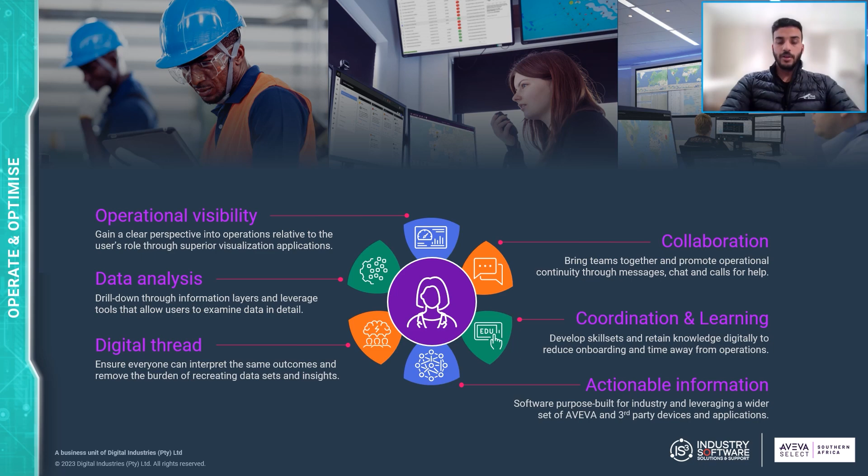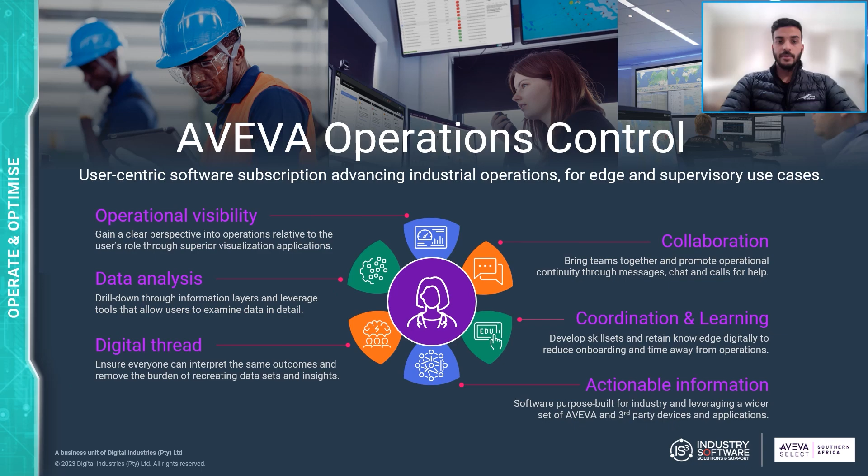It's clear that we no longer need a single product. We need a complete solution. And that solution is called AVEVA Operations Control. It's a user-centric software subscription which advances industrial operations and can be used across all operational environments. AVEVA Operations Control is an industrial software subscription that delivers visualization and control to run your operations.

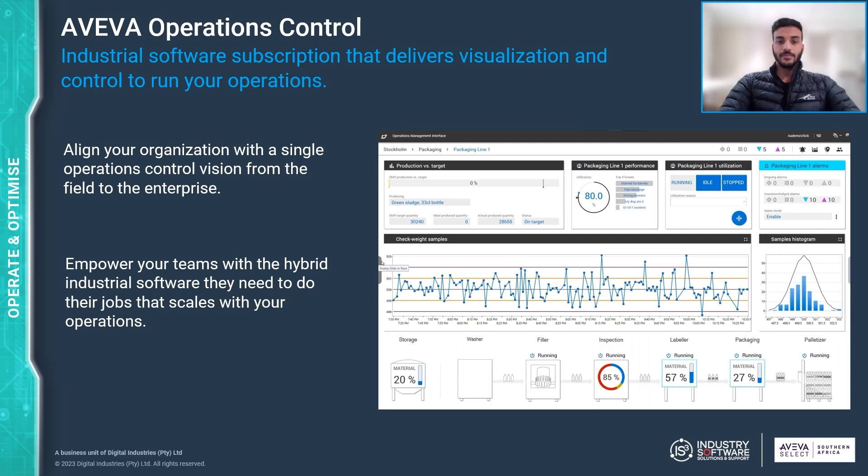AVEVA Operations Control aims to align your organization with a single operations control vision from the field level to the enterprise level. It empowers your team with the hybrid industrial software they need to do their jobs that scales with your operations. AVEVA Operations Control offers a simplified and predictable way of procuring and deploying complete world-class software solutions. These are necessary for modern operations environments, and there are several benefits to the AVEVA Operations Control offering.

Firstly, simplicity. One easy to choose package that reduces purchase and adoption complexity. Secondly, it's unlimited. There's no limitations on I/O, tags, or devices. You can expand information access to more users across your organization. Thirdly, it's comprehensive. Capability that goes beyond HMI and SCADA to drive operations excellence. And lastly, it's outcome focused. You can transform with unparalleled insights and digitize work processes and knowledge.

So we know it's a subscription model, but what forms part of the subscription? What exactly are we subscribing to? With AVEVA Operations Control, we utilize both on-premise software and software as a service. We bring this together as a hybrid SaaS software strategy. As you can see, within the SaaS set, we have software which provides collaboration, analysis, empowerment, and management functionality. These are known as your support systems, and this SaaS model provides the flexibility that we require.

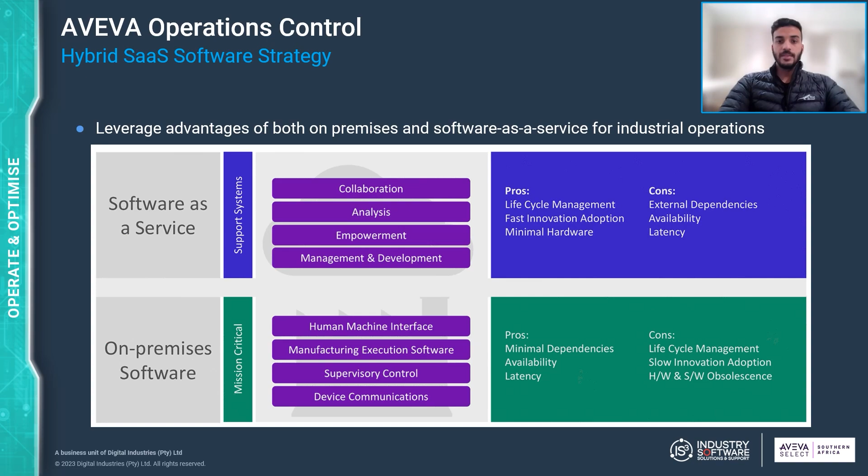So, AVEVA Operations Control, we know it's this hybrid SaaS operations software solution, and it comes in a couple of editions, each with their own unique use case. Firstly, we have the Edge Edition, which works on the control network level. This is looking at your PLCs, IoT devices, and other devices that are found on the production lines and production areas. Next up, we have the Supervisory Edition, which works on the process network level. This is your plant-wide view of your process.

And then finally, we have UOC. This does not form part of AVEVA Operations Control, but it was important to show you the distinction between the three that are available to you. UOC, or Unified Operations Center, is found on the business network, and it typically gives you that enterprise-wide view, and it consists of IT applications integrating with data management platforms.

So let's have a deeper look at the two flavors of AVEVA Operations Control and see what exactly are we getting when we subscribe to this solution with AVEVA Flex. With the Edge Edition, you get a perfect solution for frontline teams that require local process monitoring and control at the asset level or at the equipment or line level with IIoT and embedded HMI capabilities. With the Supervisory Edition, this is ideal for centralized management of distributed operations or production lines into a single unified data model aimed at driving standardization across departments.

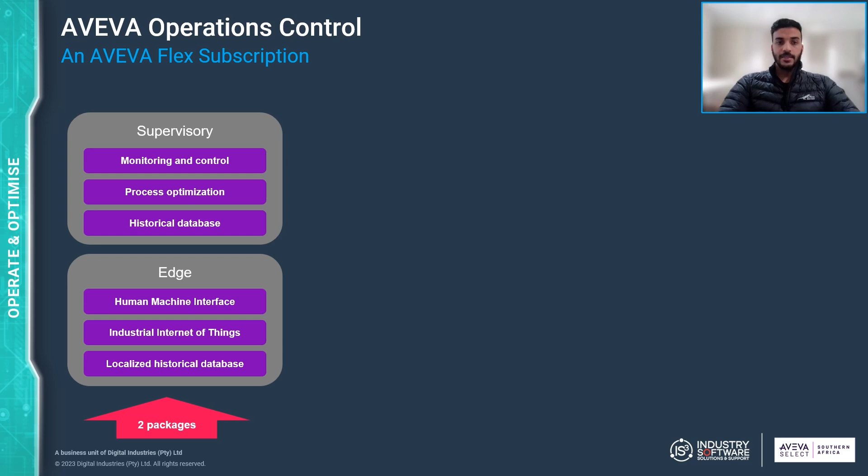So there's two packages that we mentioned. The first being your Edge, which comes with a localized historian, HMI functionality, and IIoT integration. Supervisory comes with your bigger monitoring control software, greater process optimization, and historical functionality. Included in both these packages are common components. These common components are your data communications, workforce collaboration, reporting and data analysis tools, and a few other tools that make it easy for your teams to operate. Additionally, we can add on MES and guided analytics if required.

Typically, in your process plant, you have some recipe management that is required and some production management. So we've made it easy to bolt on these products. You also have your guided analytics. We need this to gain valuable insights into our data and increase the value obtained from your operational data.

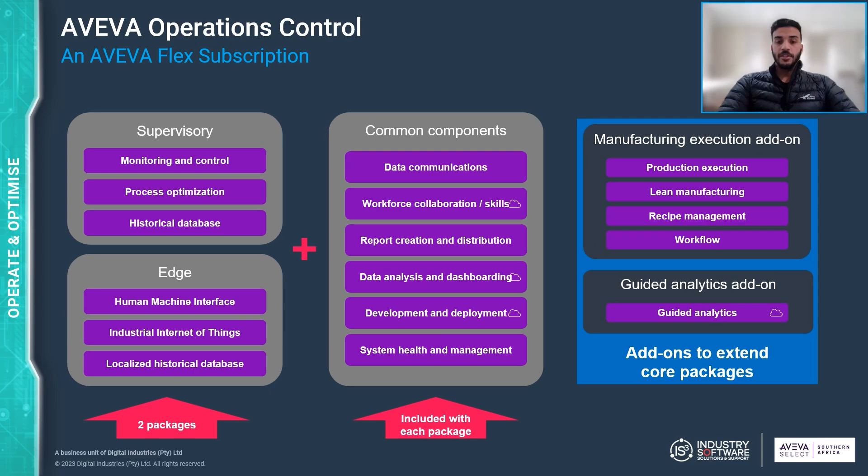So there's many products bundled together in this offering, and let's have a bit of a deeper look at what these individual products are. From the common components, first up, we have your operational visibility. And to achieve our operational visibility requirements, we utilize AVEVA Edge or AVEVA InTouch, or perhaps System Platform or AVEVA Plant SCADA, dependent on the package we choose based on the organization's unique needs.

With these products, we can achieve unlimited architectural flexibility. We can utilize responsive web clients. We can utilize templatization, styling, and standardization options. They are portable graphics with a built-in editor, extensible functionality with apps and widgets, alarm management, and we encourage collaboration with on-premise and cloud development. There's also built-in security and authentication management.

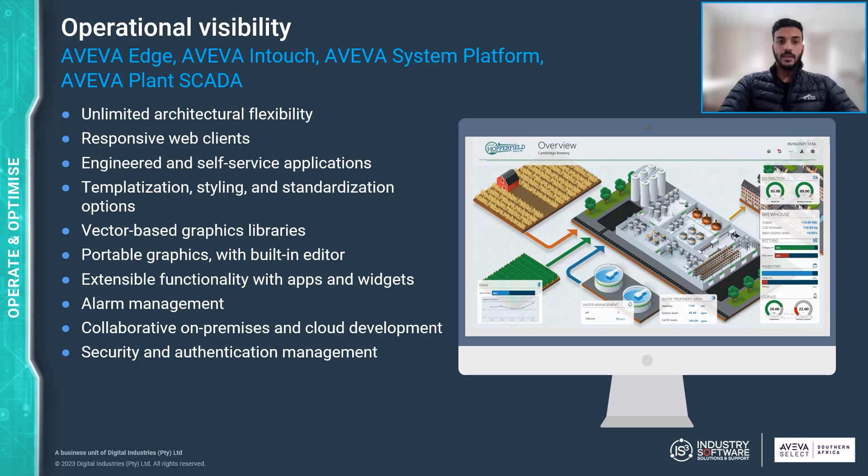To achieve actionable information, we enable access to our data through our extensive communication drivers. These AVEVA communication drivers provide vendor-agnostic connectivity and data exchange. We can utilize drivers for telemetry, industrial standards such as Modbus, and proprietary protocols such as Rockwell, Siemens. We can take advantage of REST and other API types. We can export data in common formats such as Excel. We can deploy software across various OSs, cloud infrastructure, and architectural requirements. We can also leverage AVEVA's product partner network for joint hardware and software solutions.

We also include data analysis tools in way of AVEVA Reports for Operations. And with AVEVA Reports for Operations, you can examine and replay data trends, view trends and historical data within visualization. You can utilize self-service dashboards available on-premise and in the cloud. There's AI support for predictive insights and visual anomaly detection. You can easily assemble dynamic and custom reports for digital distribution, query and export data for further use in other applications like Microsoft Excel. And then finally, you can replicate this data into AVEVA PI or AVEVA Data Hub.

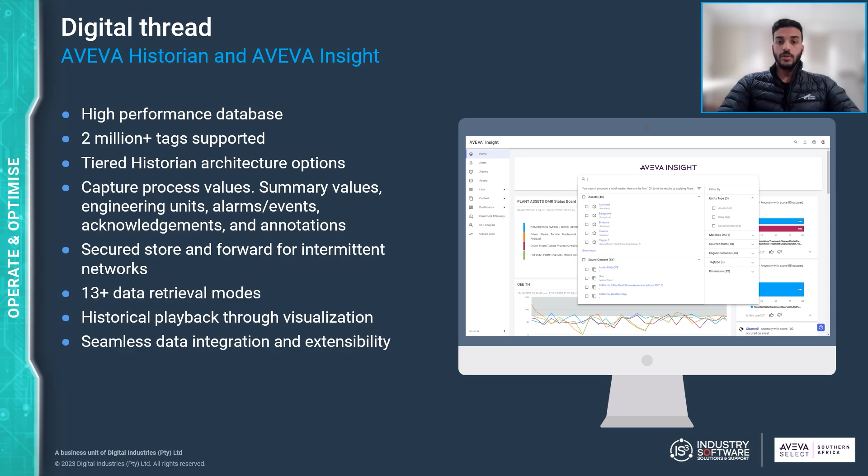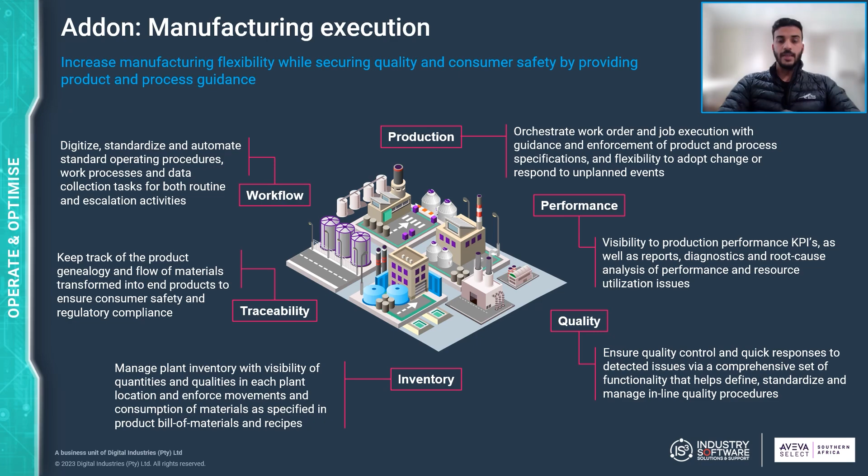With the manufacturing execution add-on, we can increase manufacturing flexibility while securing quality and consumer safety by providing product and process guidance. We can handle key aspects in our operations, such as traceability, performance, and quality with the MES add-on. And with the guided analytics add-on, we can create anomaly alerts to identify tags for monitoring. We can visualize this in AVEVA Insight and build out dashboards to give us indications into the behavior of our assets.

So that's a complete overview of the products found in the two core packages. Let's have a detailed look at what products are found within these two packages. The Edge Edition contains InTouch, AVEVA InTouch or Edge HMI. We have Communication Drivers Professional, allowing you multiple instances of drivers, a full system monitor to monitor nodes across your site, a localized historian, and a suite of other products such as Reports for Operations, AVEVA Teamwork, AVEVA Insight, and more.

The Supervisory Edition is similar, but we're aiming for a broader view of operations. So it contains System Platform or AVEVA Plant SCADA. This allows you to easily build operational visibility of your entire process. With this comes Communication Drivers, the premium version, a Tier 1 historian, and then your common products such as Development Studio, Integration Studio, Reports for Operation, AVEVA Teamwork, AVEVA Insight, as well as optionally AVEVA MES and AVEVA Guided Analytics. It's a complete buffet to a suite of world-class operational software.

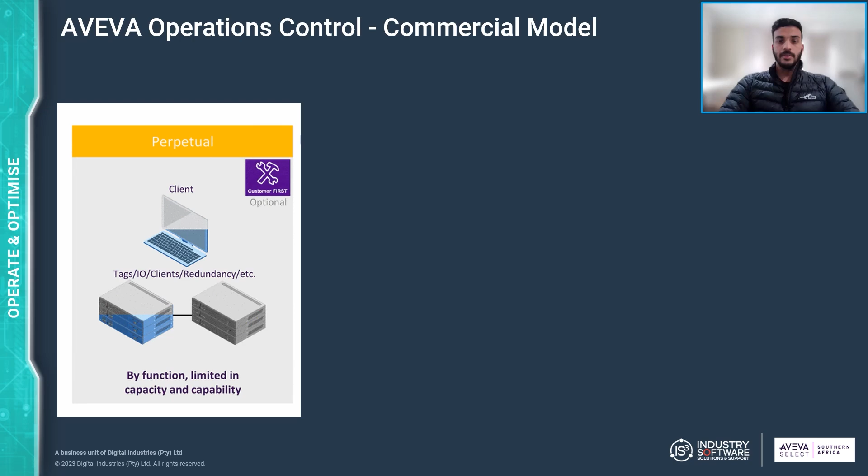So there's different commercial models. Where does AVEVA Operations Control fit in? Traditionally, we have the perpetual model. It's unfortunately limited in capacity and limited in capability. We've now moved on to AVEVA Flex, where you can subscribe to individual products. It's more agile and allows for flexibility. You are now unlimited by capacity. You can add on more, but you are still limited by capability.

The new way, AVEVA Operations Control. It's a hybrid SaaS software solution, and we are removing limitations. We are improving our operational capabilities. We are aiming for operational excellence. We want to provide our teams with the tools they require.

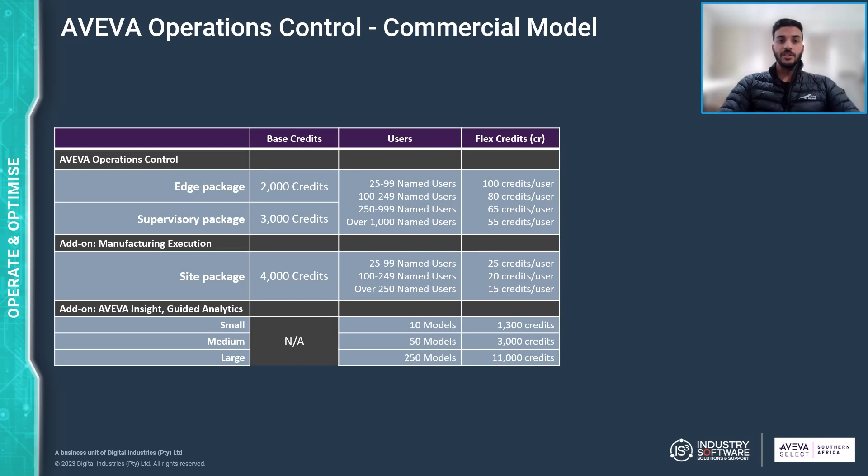So we've got a simple model with AVEVA Flex, with each package having a known fixed cost. We are transitioning away from traditional licensing by offering unlimited I/O, tags, screens, operational visibility, and unlimited information access. We are now shifting to a named user approach. So an example where a customer has 4 shifts of 10 people each for a total of 40 employees. That would equate to 40 named users.

We are encouraging utilization by using a tiered approach to your Flex credits, starting with 100 credits per user down to 55 credits. By utilizing the named user approach, we're enhancing security, we're supporting regulatory requirements, and we're aligning with modern IT best practices for user and role management.

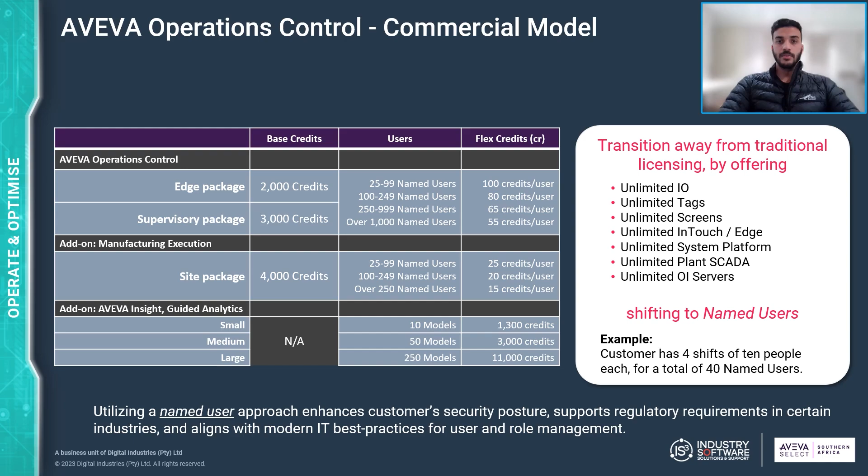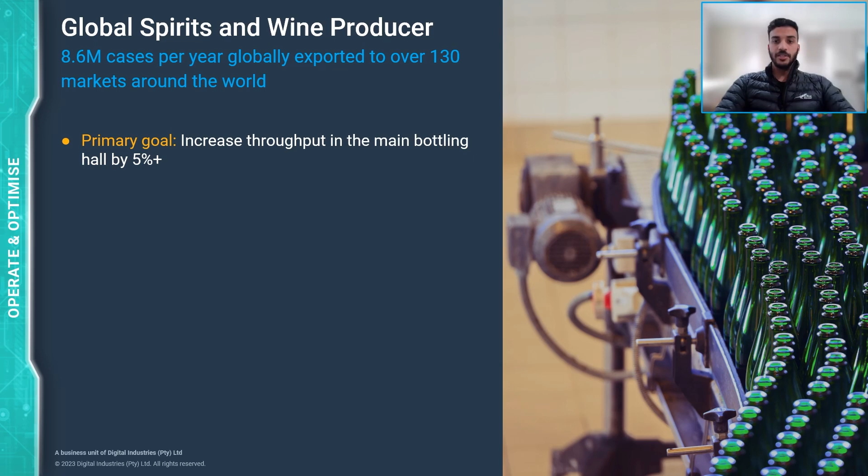I'll end off with one of the many success stories that are available on the AVEVA website and on IS3's website. We have a global spirits and wine producer that was exporting 8.6 million cases per year globally to over 130 markets around the world. They had many different systems from many different vendors, and their main objective was to increase the throughput of their bottling line by 5%. But because of these existing systems, they had reached a point where they needed to be more efficient in their communications, as there were delays caused by architectural limitations. There were delays in getting information to their operators, and there were system application limitations due to a lack of process authorization.

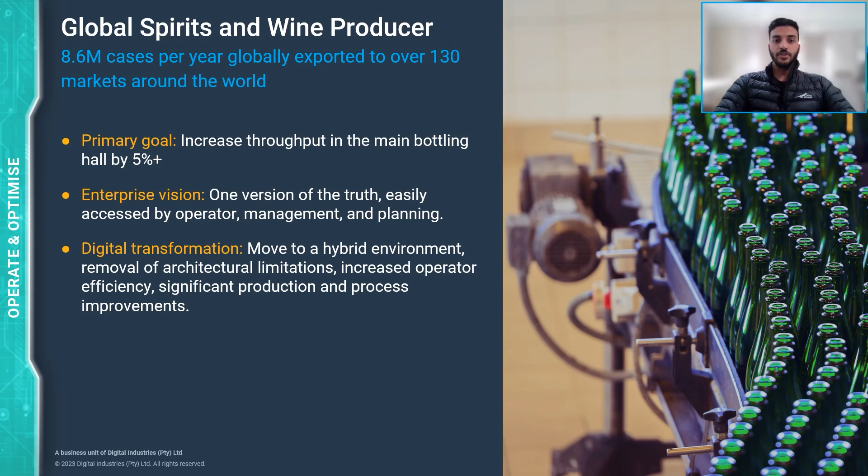Enterprise Vision was one version of truth, easily accessed by operators, management, and planning teams. So what they did, they moved to a hybrid environment. They utilized AVEVA Operations Control, the supervisory package, with 50 named users and an additional 25 MES users, which they bolted on. With this, they were able to increase operator efficiency and allow for significant production and process improvements. There was a significant reduction in upfront costs and capital expenditure, having a known fixed cost over a 5-year period.

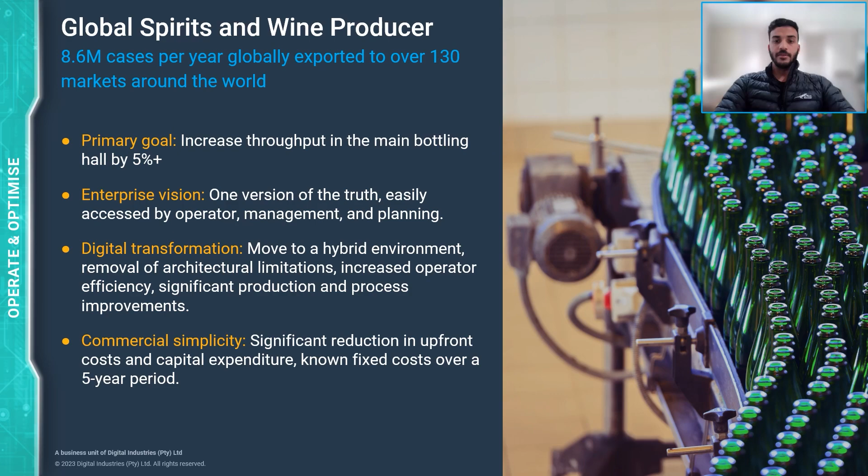So we've covered a lot of information in this webinar. Let's have a quick look at a glance at what AVEVA Operations Control is. We know that it's a user-centric software subscription, and it allows for architectural flexibility by utilizing a hybrid SaaS model. You get access to a comprehensive and unlimited software capability set. You are given HMI SCADA visualization with mobility, a process historian. You get some reporting and data analysis tools, some analytical dashboarding with AI integration.

You're enabling collaboration and team communication, knowledge and skills management. You can bolt on manufacturing execution functionality. You have your communication drivers that give you access to your asset information. There are several development tools that are provided in the package, as well as system health and diagnostic tools. Inclusive is technical support and software updates. So that's AVEVA Operations Control at a glance. That rounds up this webinar on AVEVA Operations Control.